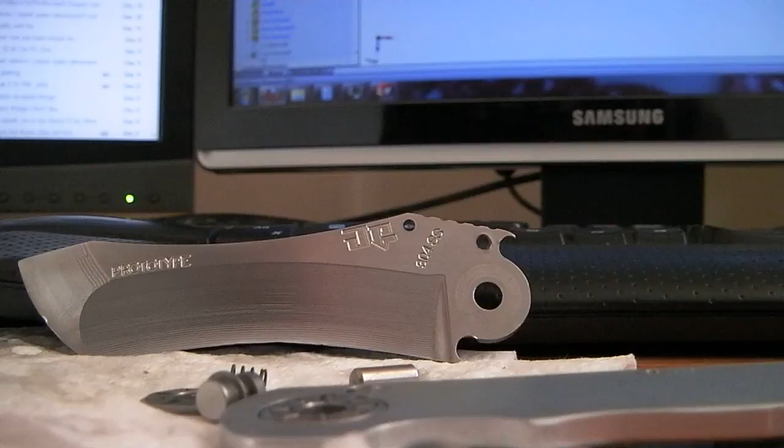It's Tuesday again, and this week I'm going to dissect my knife and figure out why it didn't work and how I can make it better in every aspect, and get the button lock perfected. So it's all going to be design work and fiddling on the computer today.

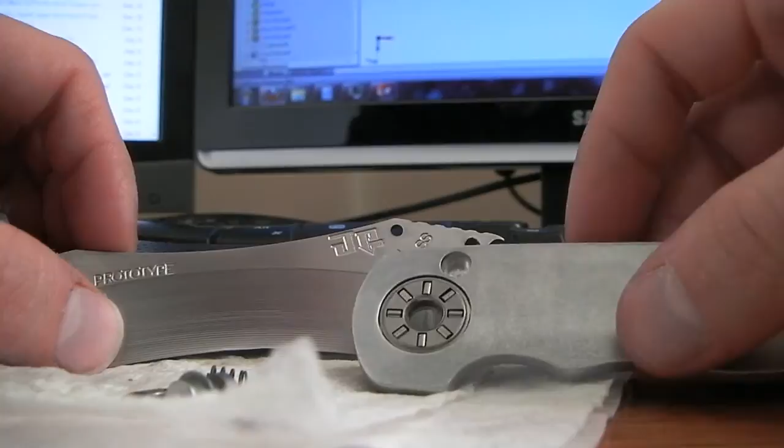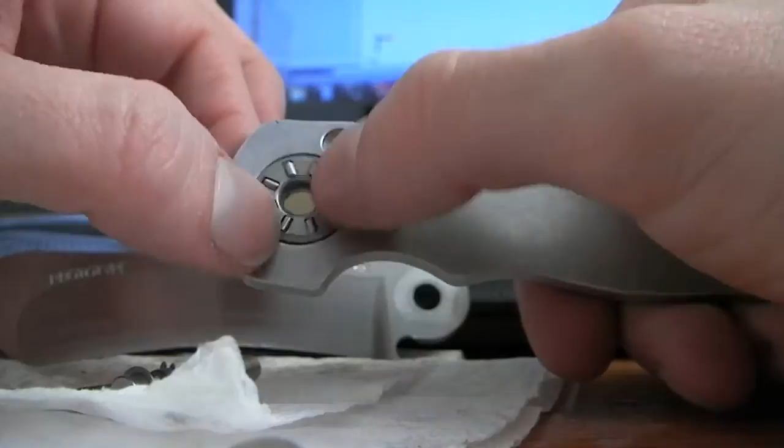Nothing too exciting, but here's kind of the internals of my knife. You can see these monster 1/4-inch bearings that I'm using. They're not ball bearings, they're roller bearings, but same principle basically. These have more surface area and in my opinion are quite a bit stronger, but nothing wrong with ball bearings either.

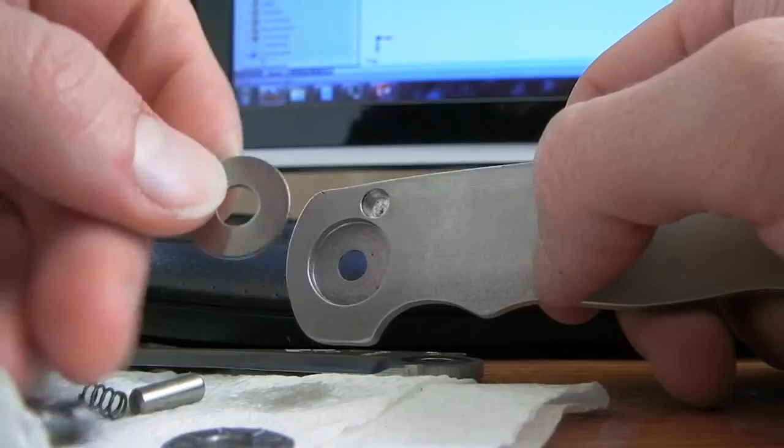And there's inside here a hardened steel washer. It's pretty thick, doesn't have to be this thick, but mates to the bearing just fine. That way the bearing's not riding on soft aluminum or even on titanium, because titanium doesn't make the best bearing surface, but hardened steel, that's the trick.

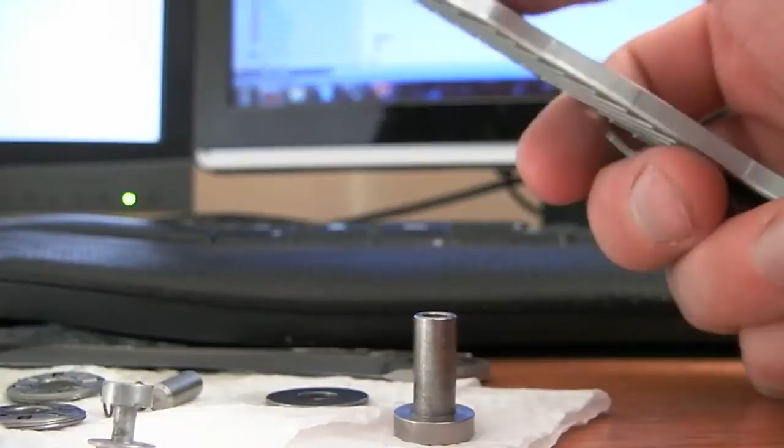So I got my button lock right here, and this is the hole that it goes in. The spring, this little spring, goes in there first, but let me just assemble it.

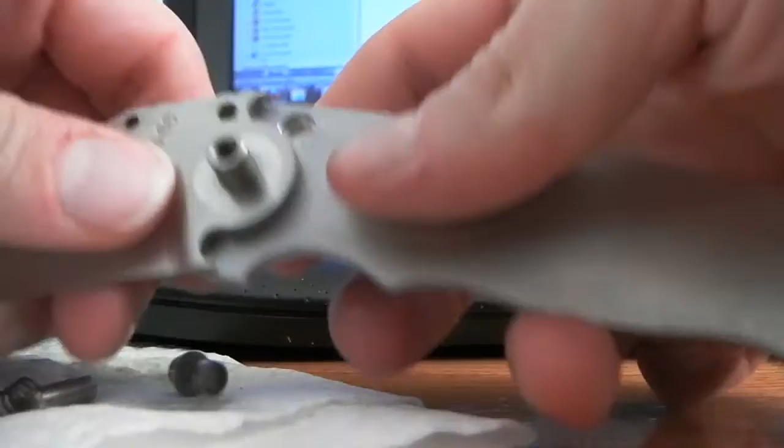Alright, so that's how it goes together. The button lock goes in there. And notice there's no stop pin on this knife, because when I was designing it, I couldn't figure out where to put it, so I gave up and just made the blade anyway, which is one of the big reasons why it doesn't lock, of course.

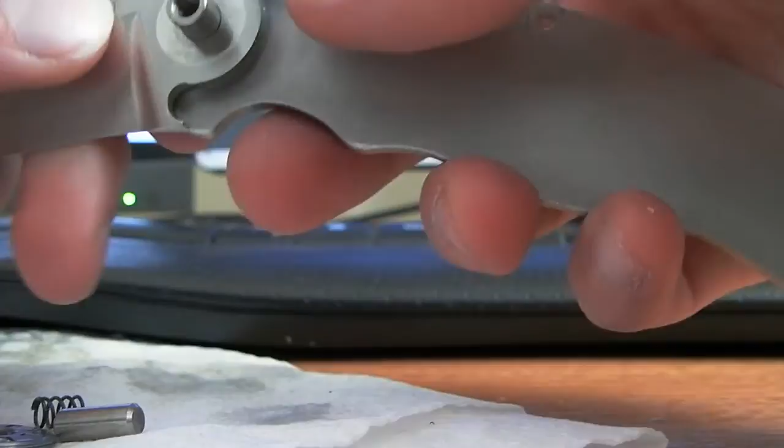So I need to add a stop pin. Here's the stop pin I'm going to be using. It's 3/16 diameter, 1/2 inch long, probably too long, I'll have to cut it down a little bit, but 3/16 diameter, nice and beefy. I'm going to end up putting it up here in the corner.

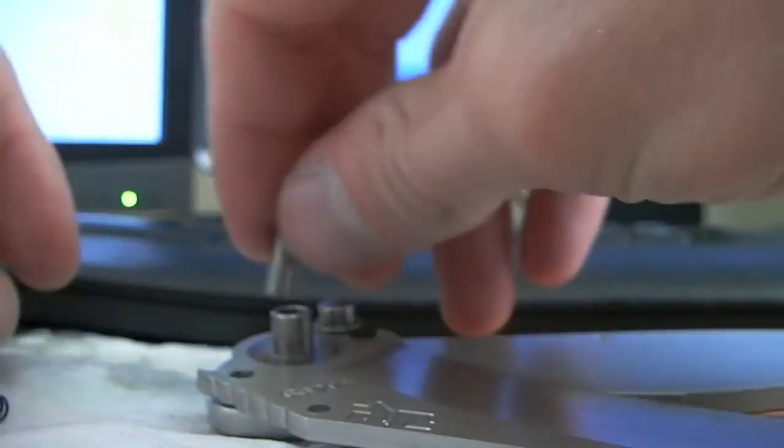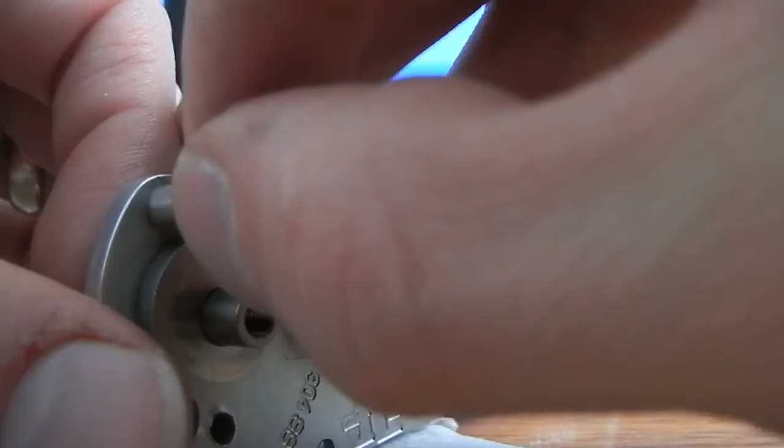It's hard to show you without getting my fingers in the way, but I want to put it right up there, not totally flush up against the edge, but inset a little bit, wherever I can - somewhere like that. So I'll drill some 3/16 inch holes on both sides, get it nice and tight in there.

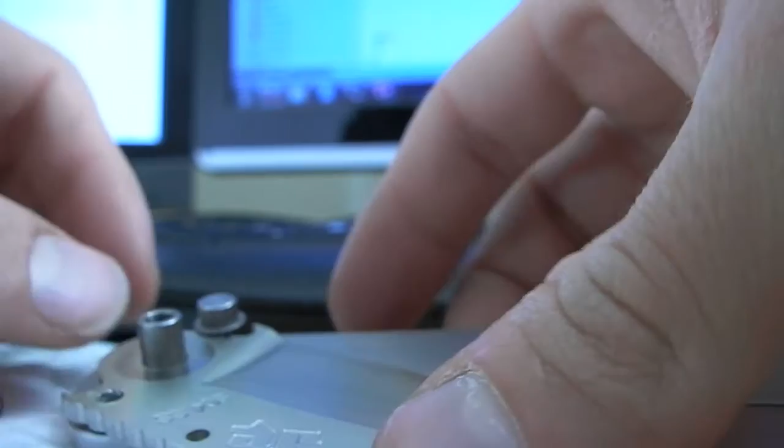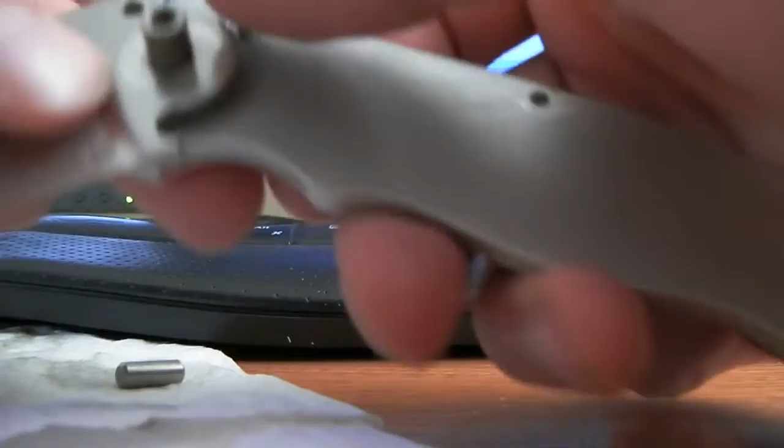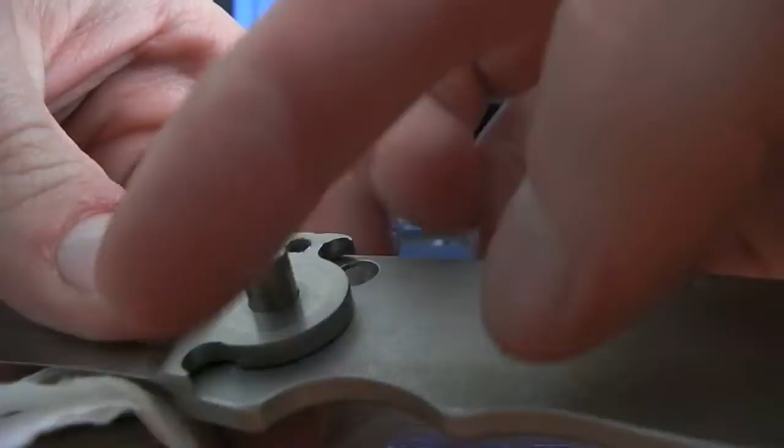And what's going to happen is, of course my pivot fell out again. What's going to happen is, as the blade comes up, there's going to be a section on the blade here that's going to bash up against the stop pin, and that keeps it from going any further. And then the button lock - what I did originally is, you can see these curved areas here and down here, they're tapered 8 degrees, tapered away from the camera, and that's pretty much wrong.

Instead of putting it up here, I need to put it here. Because as the blade's coming up and riding against the stop pin right here, this section where it locks needs to keep it from moving down again. So if I put it right here, you can see how the tool is rotating with the blade. So this section needs to be locked in by the button lock, not this section up here. This is pointless - this doesn't have to be here at all.

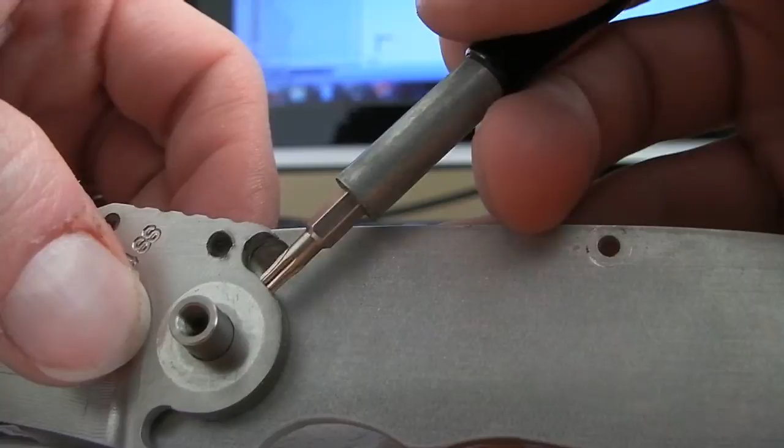So the notch and the tapered degree has to be somewhere in this arc. And same thing for down here in the closed position - it needs to be up here, not over here.

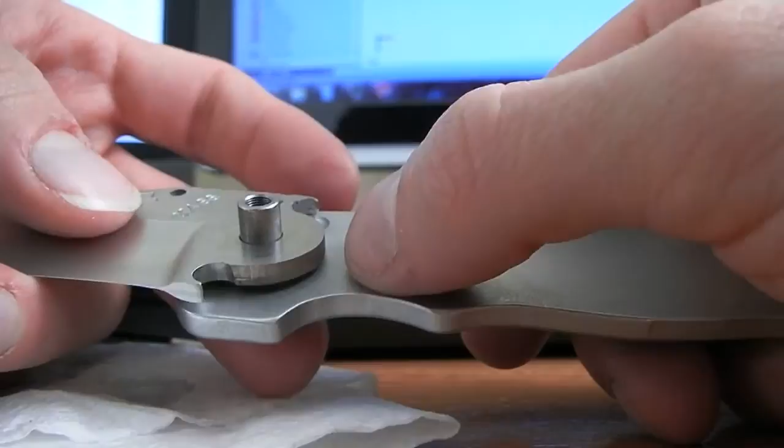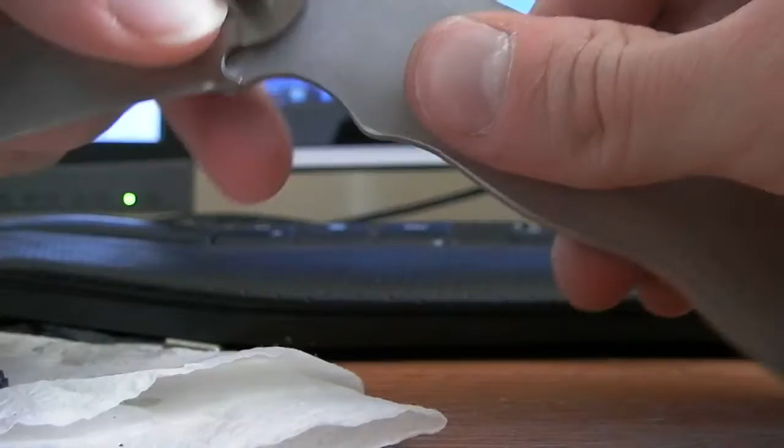So now I know. This is the point of making this knife - to fail, and to fail better next time. So pretty sure that the next one I make can be awesome and actually work. And then it'll just be a matter of tweaking the exact stop pin location, so that it gets a nice tight lockup in both the open and the closed position.

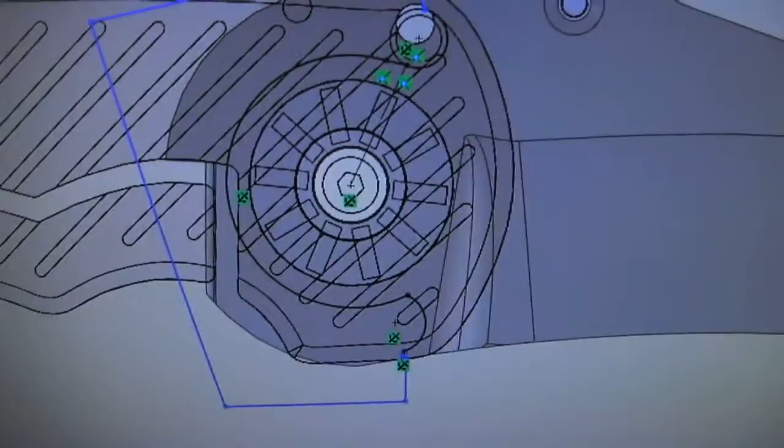I got SolidWorks open right here. You can see I'm sort of playing with - it's hard to see really - this is where the stop pin's going to go. This circle right here is the stop pin, and then this is going to be part of the blade that rides up against the stop pin, so I'm going to cut that out.

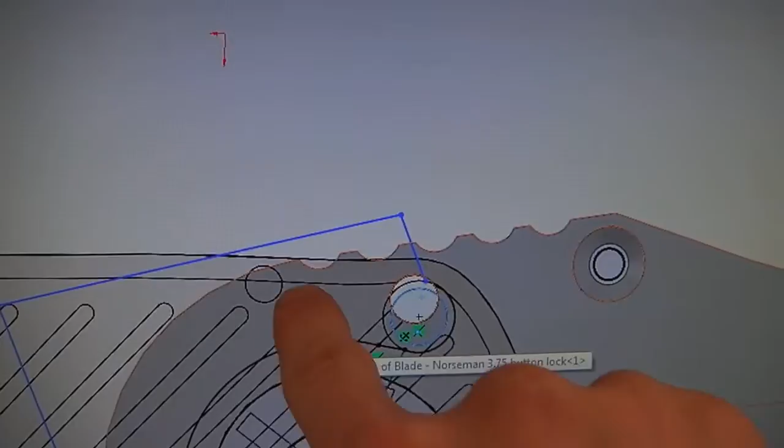And then the button lock is going to go right about here, and then I'm going to cut a divot into the blade here, tapered 8 degrees or 7 degrees, so that the lock will engage. Now, a lot of knife makers are talking about this triangle of locks.

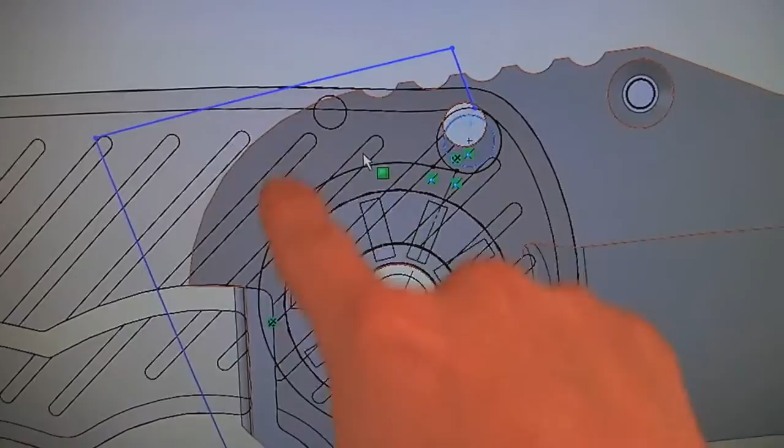So there's the pivot, the stop pin, and then the button, or in the case of a frame lock would be here. This is obviously not a frame lock. But in the case of a button lock, this triangle, in my opinion, the farther apart it is, the stronger

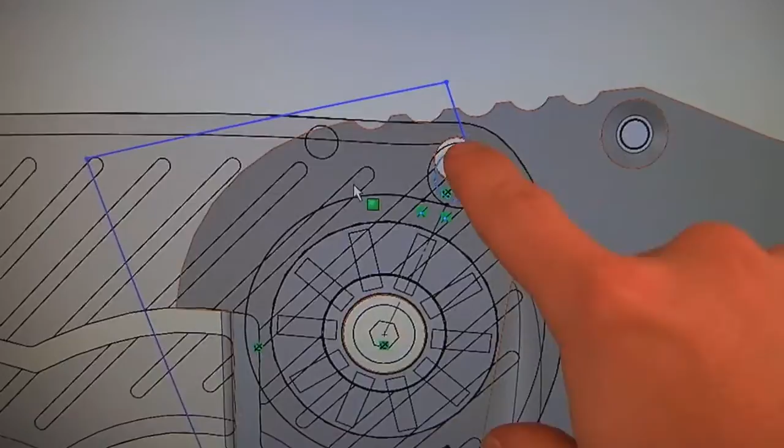it'll be. It's like leverage, right? So I'll have to play with that, and you can only put the pieces so far away. The stop pin can only go so high, and the button lock can only conceivably go so far back, so I'll have to keep playing with that.

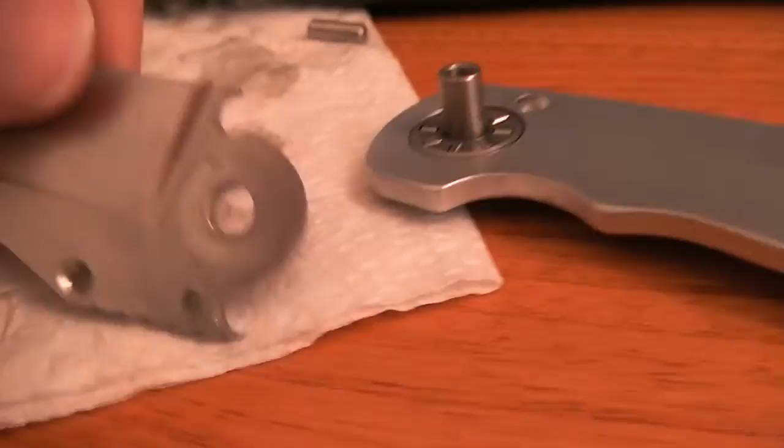Another thing I wanted to mention for the machinist nerds who are subscribed to my channel, I say that very lovingly, I'm not trying to offend.

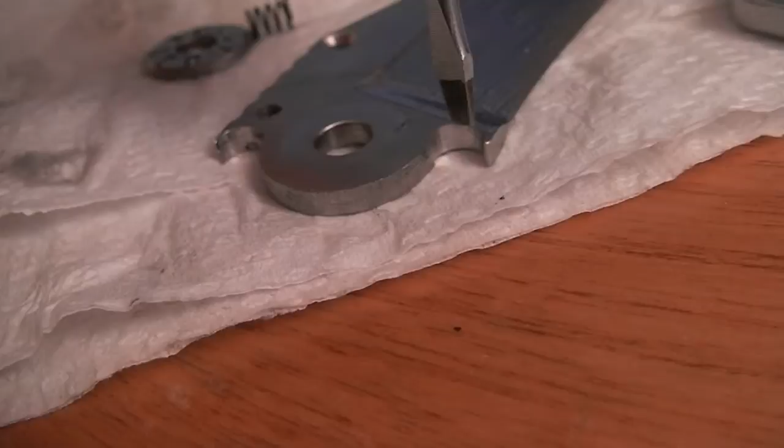These tapered sections right here are tapered 8 degrees. What I did is I used an 1/8 inch end mill, and I went down 1/1000th of an inch, circle, down 1/1000, circle, down 1/1000. It took freaking forever. To do 2 blades, it took an hour 45. That's just pathetic. So what I'm going to do,

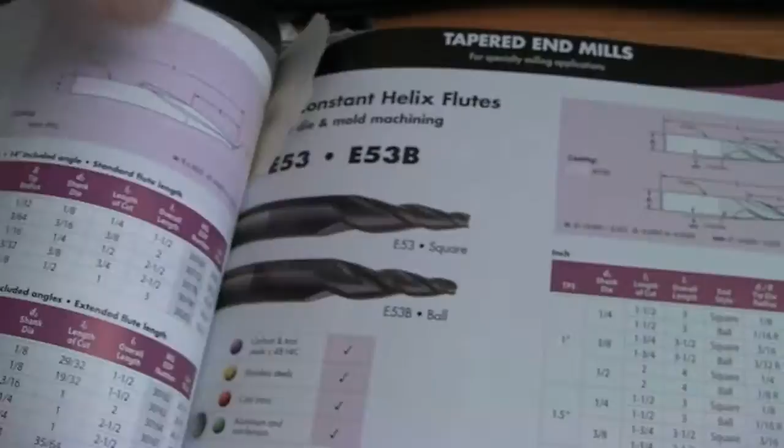sorry about that. This is an IMCO catalog for end mills. If I can find my tab here. This one, these guys are tapered.

So I'm going to buy one that is 1/4 inch shank, tapered 7 degrees. I was shooting for 8, but I'll make 7 work, no problem. 1/4 inch diameter, 1-1/2 inch length of cut, 3 inches overall.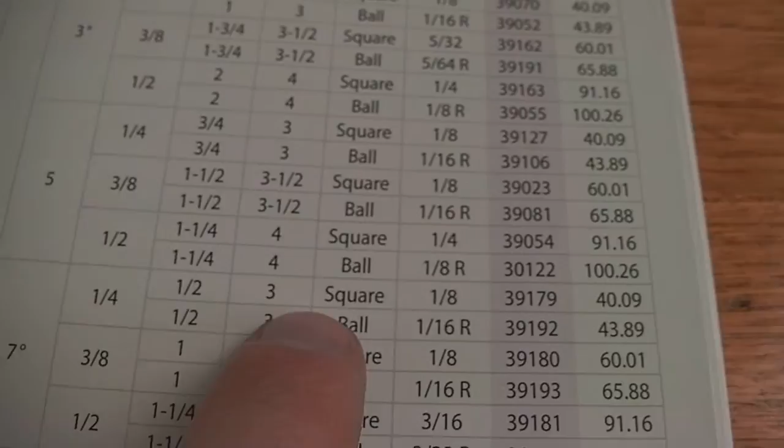And I'm going to buy the ball. Here's the difference: ball end mill, square end mill. I'm going to buy the ball, or actually I ordered it already. That one tool is $43 retail, so not very cheap at all.

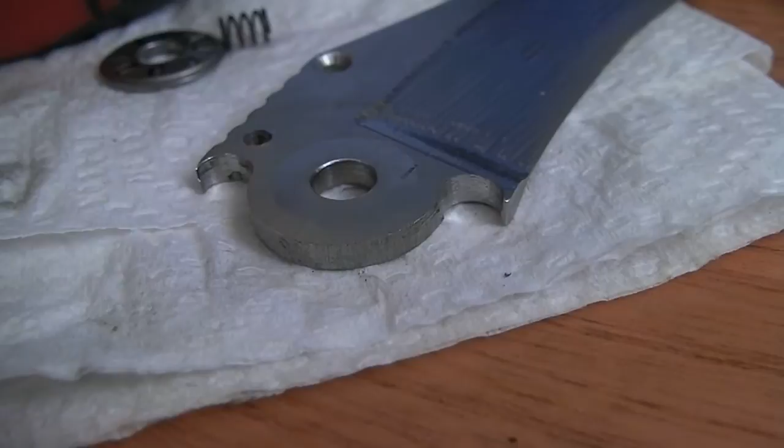But it'll let me, you know, profile the blade out with my 1/4 inch or 1/8 inch end mill or whatever, and then it'll let me do these lock bar cutouts in one single pass instead of an hour 45 of step downs. So pretty excited about that. That'll be worth a $43 tool as long as I don't break it.

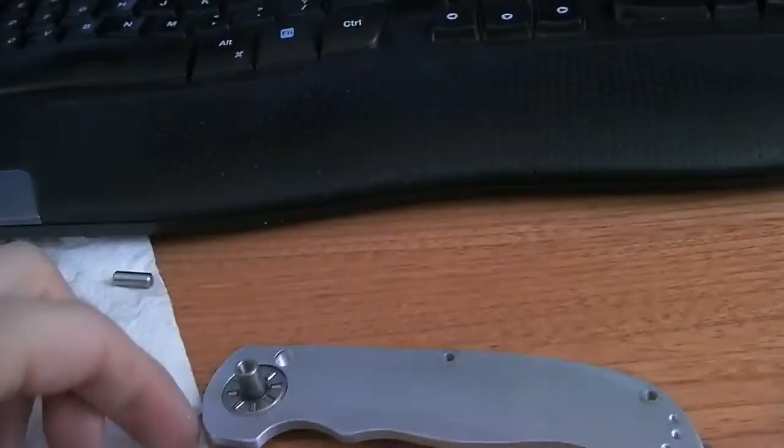Other thing, I've come up with a name for this knife. Pretty excited about that. I am a full-blooded Norwegian and very proud of it, so I'm going to call this the Norseman.

So you are looking at Norseman Prototype 001. I think it actually says so right in there.

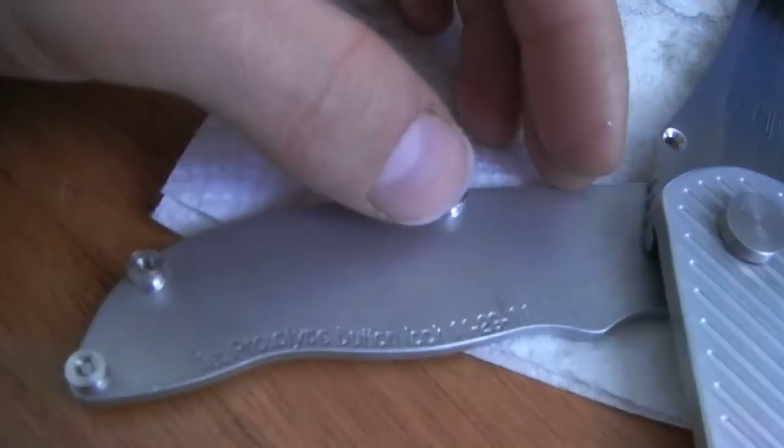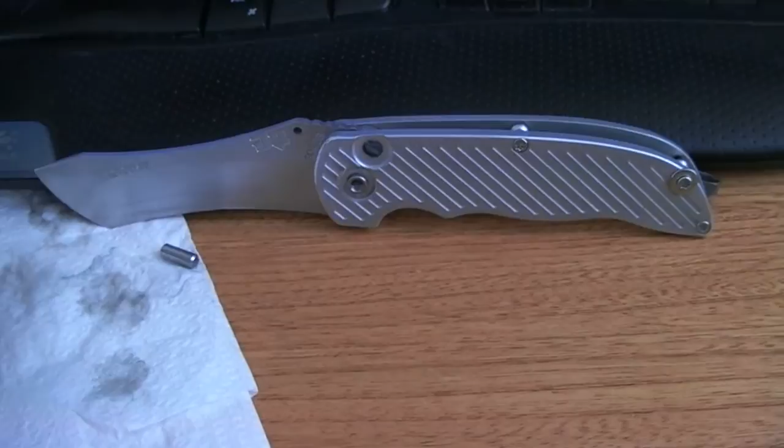So, Norseman, I already have a crazy amount of people interested in buying this knife, which is blowing my mind. So I need to really get on it and get these things produced.

I'm hoping to have, it's about a week before Christmas now, I'm hoping to have this figured out within January sometime. So then hopefully middle to late January I can actually start making a perfect sellable knife.

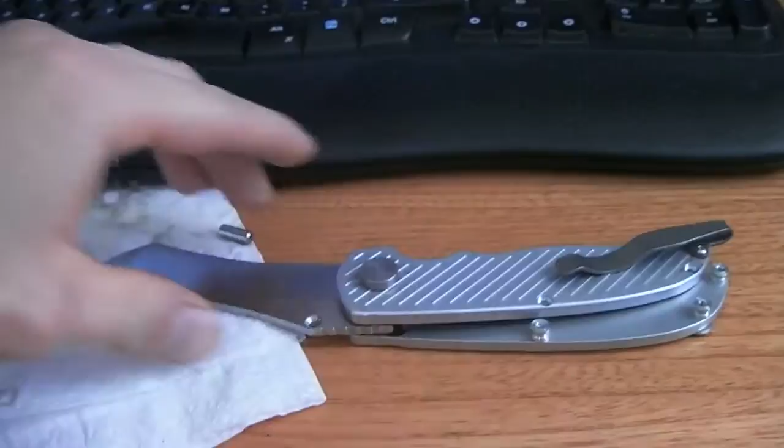And I'll be using RWL 34 steel because it's, you know, Swedish, Norse, Nordic. And this is 1/8 inch thick. I think I'm going to step it up to 5/32 inch. So this is 0.125, and I'm going to step it up to 0.156. Going to be a noticeable thickness increase, and should just make it nice and beefy overall.

And of course I'll be making them with titanium handles as well, which will be a whole nother project to figure out how to machine titanium. Stainless was hard enough. So I'm still not sure what I'm going to do with the clip.

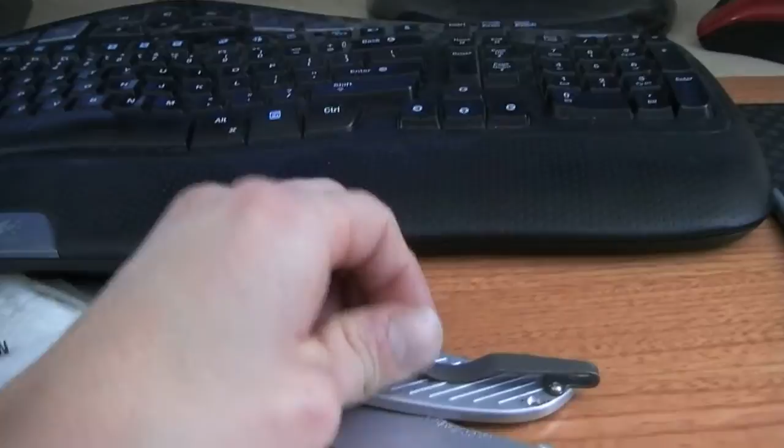I kind of like this lowrider clip, but I kind of don't like it. And then I've also got this one as well, anodized bronze. I don't know yet. In a perfect world, I would make my own clip from scratch.

These are purchased items. I don't know. Making a clip just adds another level of complexity, which I want to do eventually, but for this first knife, maybe I'll skip that. Keep it simple. Get some knives out in the market and get some feedback from them.

Anyway, that's pretty much all I have to say today. I don't have a lot of time to work on this. Wife's working today. I'm on babysitting duty, and baby's sleeping right now, so got a few minutes to play.

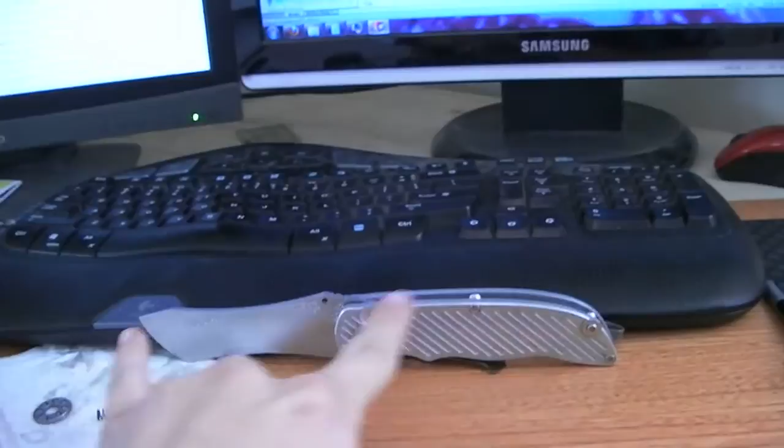But yeah, the Norseman, I love it. And this is about 9 inches overall with a 3 3/4 inch blade. And I want to make a Norseman micro at some point, maybe 2 to 3 inches shorter.